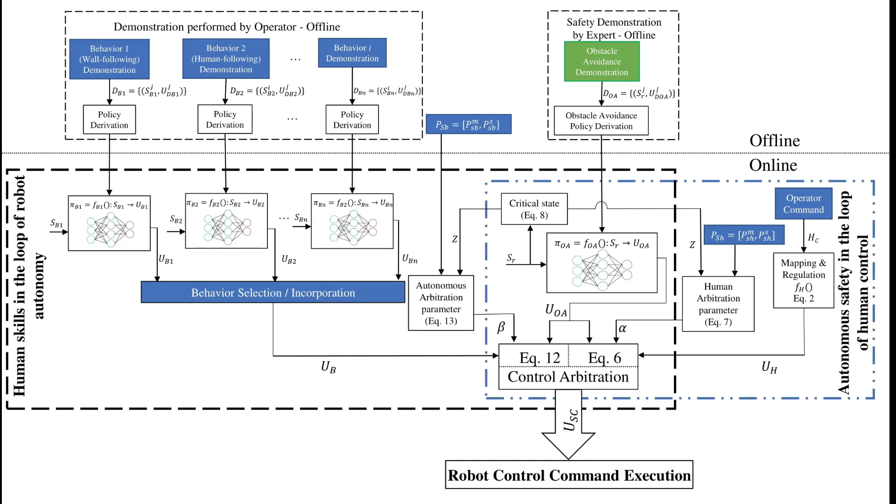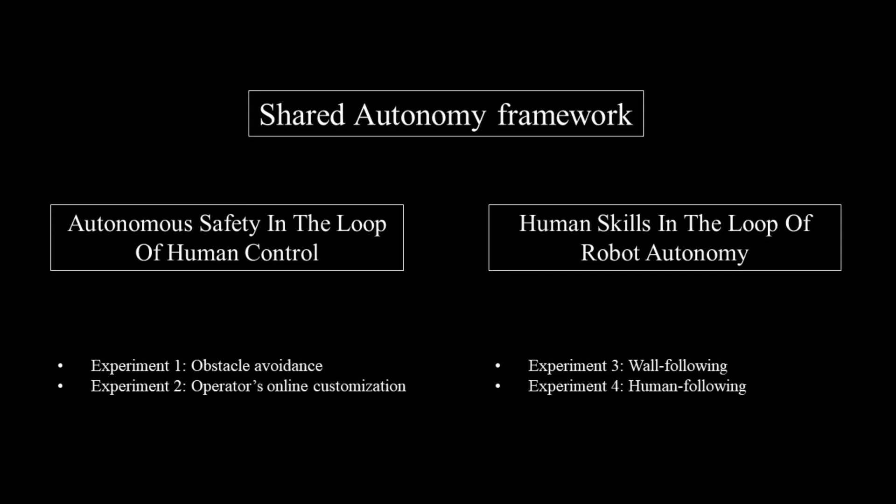In order to investigate various aspects of the framework, 4 experiments were conducted. The first 2 experiments would analyze obstacle avoidance capabilities of the first structural block in various conditions and the effect of online user customizable safety parameters. For investigation of human skills in the loop of robot autonomy, 2 behaviors of wall following and human following are taught to the robot, and the performance of this structural block is presented in each case.

The first experiment is implemented to test the autonomous obstacle avoidance capabilities in the loop of human control for 3 scenarios and 2 different sized obstacles. The obstacle avoidance commands are generated by a trained shallow neural network based on the pre-processed ranging information from robot's laser rangefinder. As safety is a vital feature, it is learned from an expert's demonstrations.

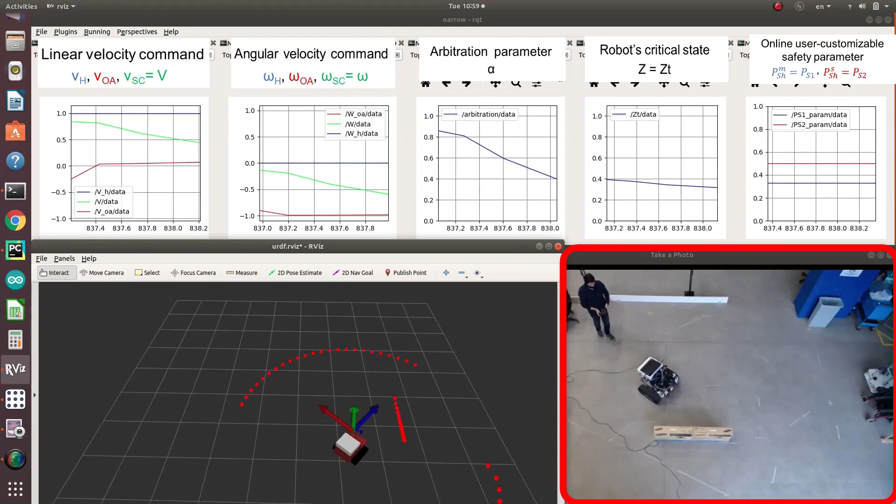Here is one frame of an experiment you are about to see. The bottom right window is a video clip of the experiment recorded by the top view camera. In the first experiment, the operator navigates the robot toward colliding with the obstacle. The arbitration function should gradually take control from the user and allocate it to the safety block. The bottom left window shows the robot's URDF and its pre-processed ranging information.

The operator's command is shown by a blue arrow, obstacle avoidance is shown in red, and the final shared control command is depicted by a green arrow. Similarly, the 2 boxes on the top left represent the linear and angular velocity commands of human, safety, and the shared autonomy in blue, red, and green.

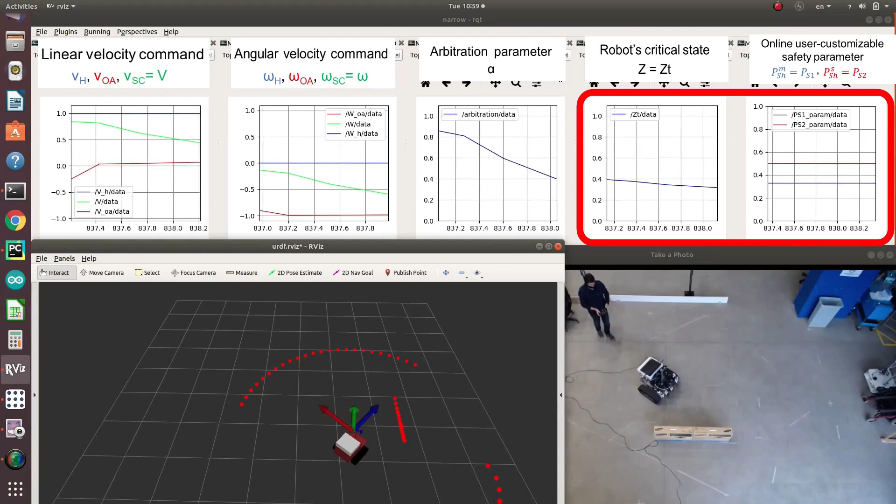The control sharing between the human and autonomy is based on the arbitration parameter, and that also depends on robot's critical state Z and user customizable safety parameters PSH. Z is defined based on the robot's pre-processed ranging information, and PSH defines the level and smoothness of the transition. As you can see, by decreasing the robot's critical state and based on safety parameters, the arbitration parameter smoothly decreases, allocating control from user to autonomous safety.

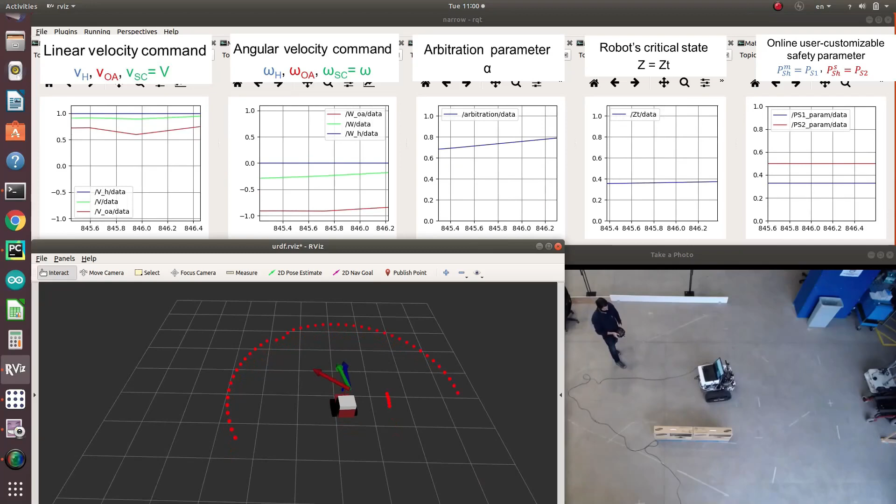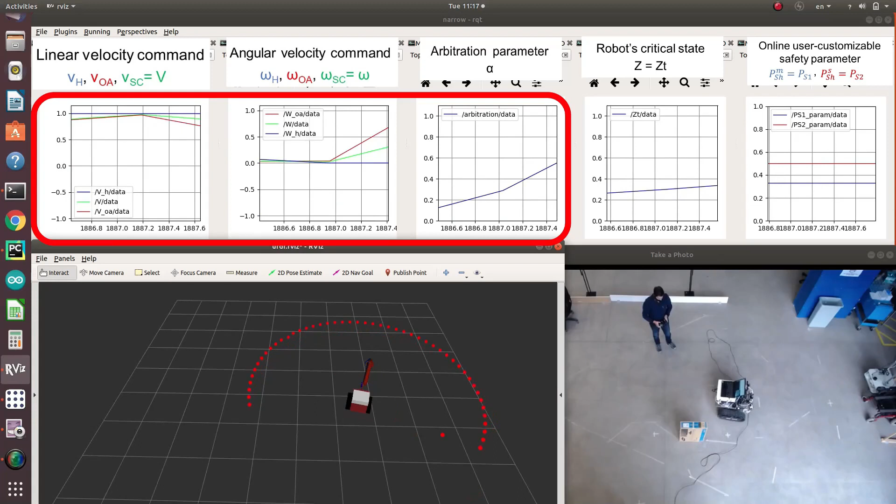Another item worth mentioning is that as soon as the obstacle is not in the danger zone defined by safety parameters, the arbitration parameter increases, restoring the operator's control over the robot.

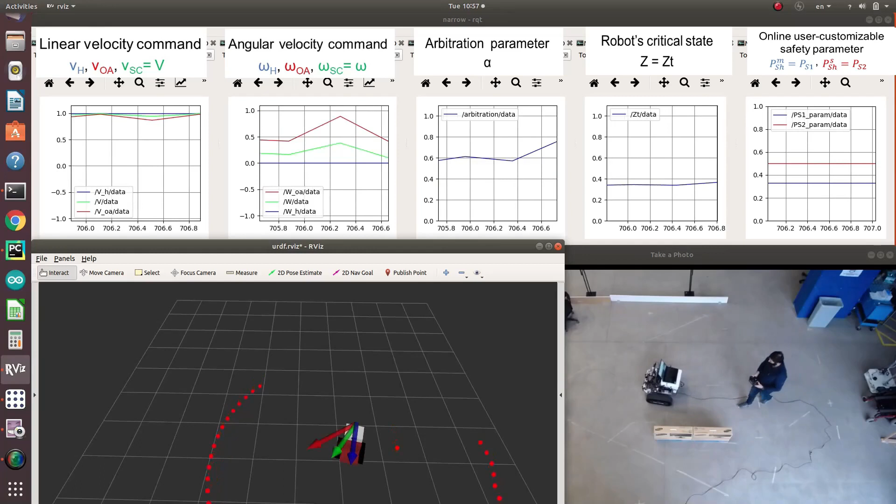In this experiment, we would test the online user customizable transition parameters. In real-life applications, an operator may face different scenarios and environments that a predefined level of safety would not be suitable for, and as a result, limiting his or her ability to finish a task. Online user customizable parameters allow the user to cautiously alter the danger zone to suit the specific scenario.

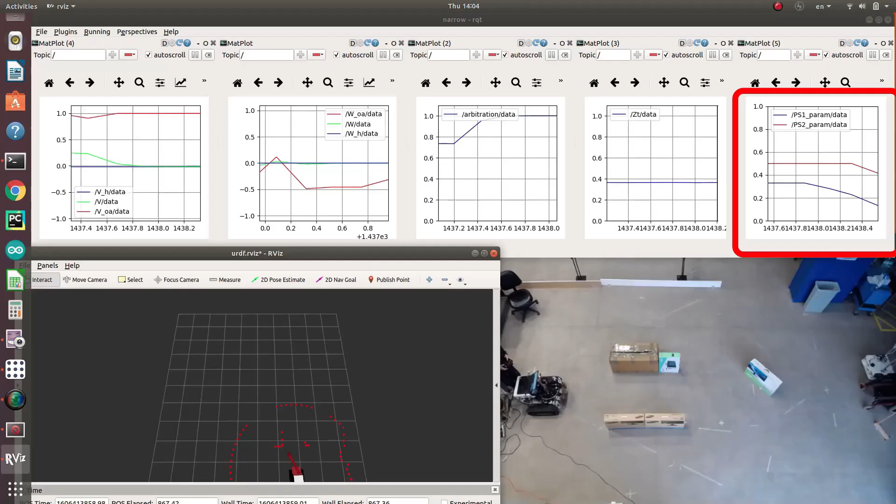Here, the operator should decrease the danger zone to pass through a narrow passage. After the pass, he restores the transition parameters and navigates toward the remaining obstacle, but autonomy steers away from the collision.

Now, we want to test the capabilities of human skills in the loop of autonomous control. This mode allows the operator to teach structured behaviors to a robot through learning from demonstration. The output of the trained model is then fused with aforementioned obstacle avoidance command based on the arbitration parameter, ensuring the safety of the behavior. The arbitration parameter itself depends on robot's critical state Z and offline user-defined safety parameters for the behavior.

In this work, wall following and human following were selected as examples of required structured behaviors and learned from the operator. Wall following is learned from operator's demonstration in some simple short scenarios. A shallow neural network regressor is used for the training process. Now the trained autonomy is faced with two complex wall following scenarios. Here is the first scenario.

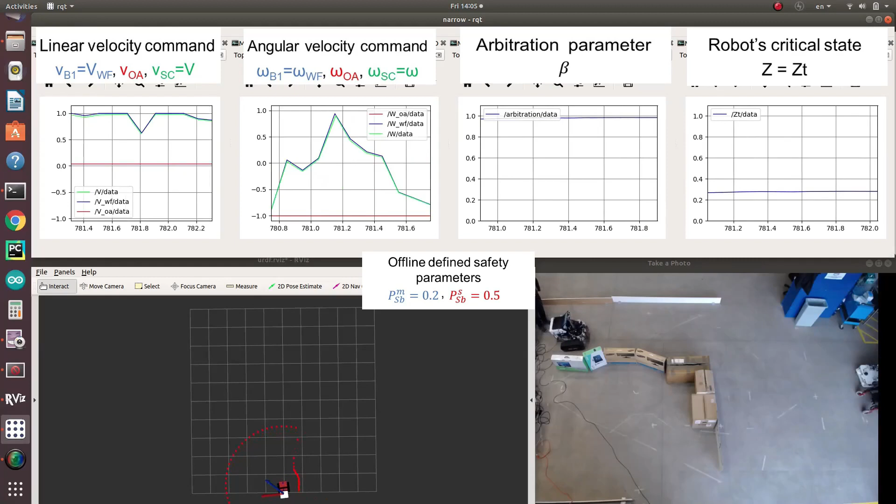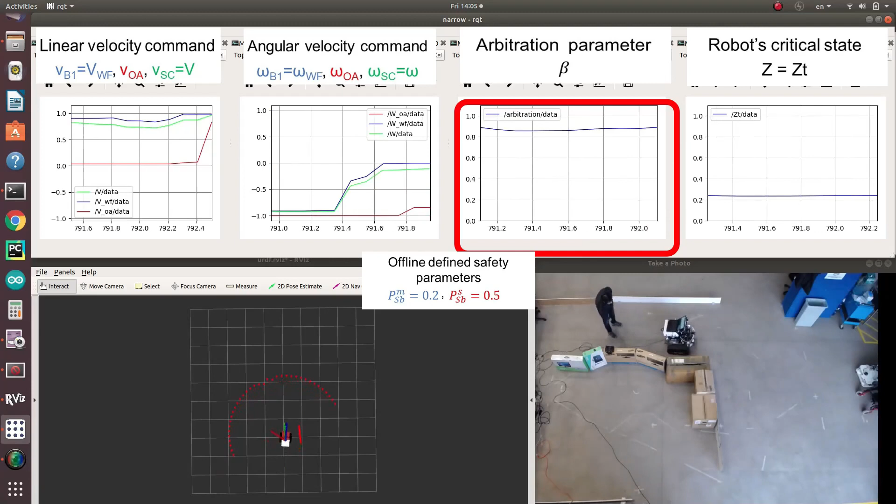As you can see, the fusion between wall following and obstacle avoidance is governed by the arbitration parameter. Offline safety parameters are set by the operator based on his experience of the task and environment, ensuring the safety and smoothness of the operation.

As you saw, a model trained from a simple structured neural network was able to mimic operators' behavior and complete two complex wall-following scenarios with human-like performance.

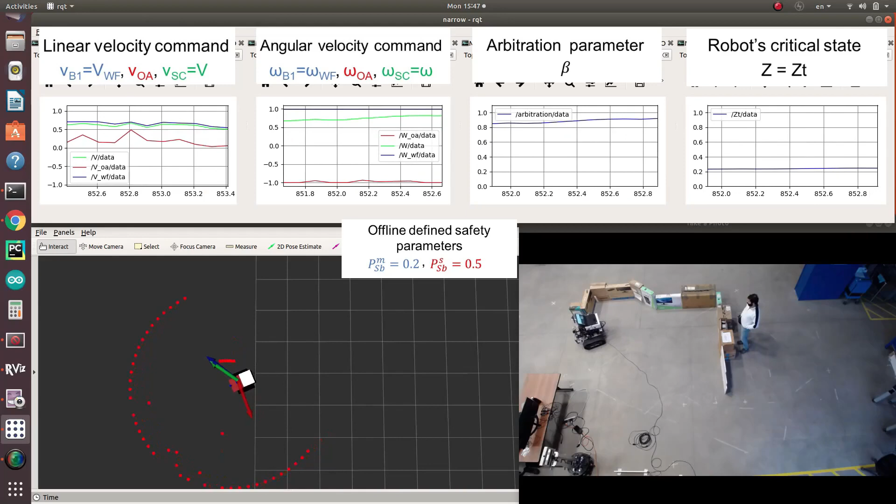As a second example of autonomous behaviors learned from demonstration, the operator trained the mobile robot for human following. Human detection and tracking are done using an RGBD camera. Target's relative position and distance to robot were chosen as inputs of a 4-layered, simple structured neural network regressor.

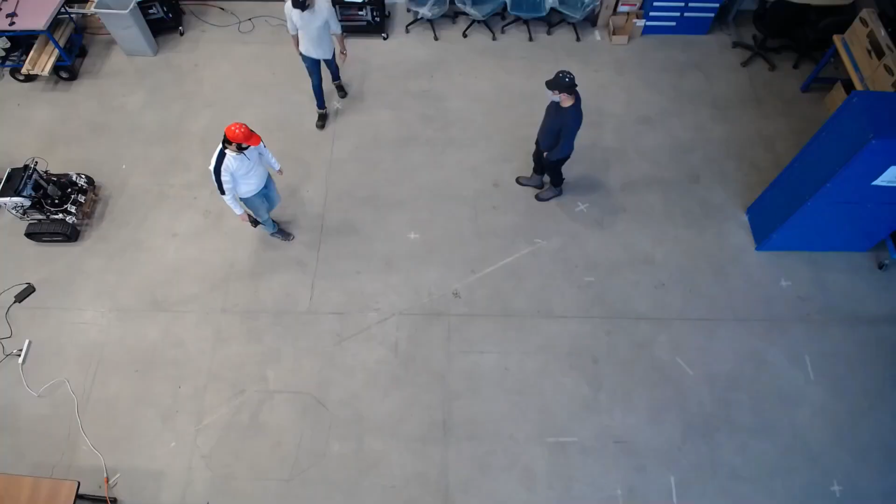Output commands of the trained behavior are then fused with obstacle avoidance commands based on arbitration parameter to ensure safety in human-populated environment. For demonstration, a scenario was designed where the robot has to follow the person in the red hat. The second person passes the robot in the front to add distortion and increase the complexity.

Third person in blue shirt walks toward the robot to test the obstacle avoidance in a dynamic scenario. We have recorded this experiment from multiple sources, including a top view camera, motion tracking system, robot's camera, and RViz.

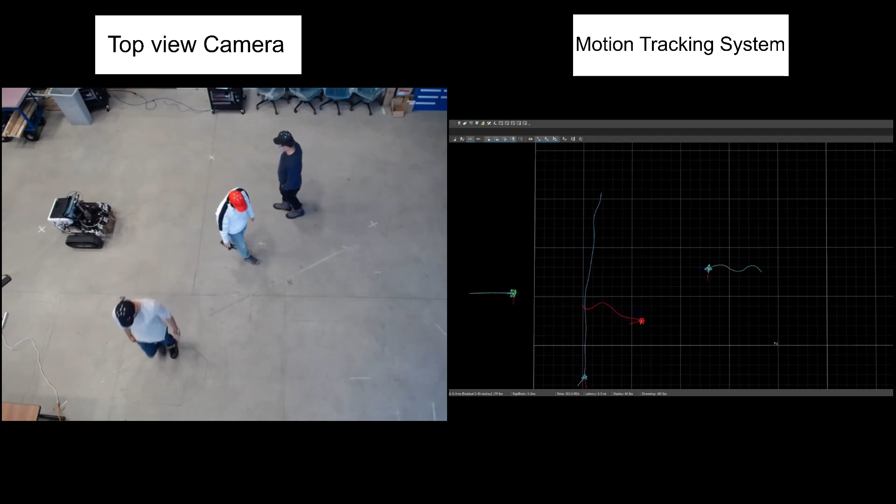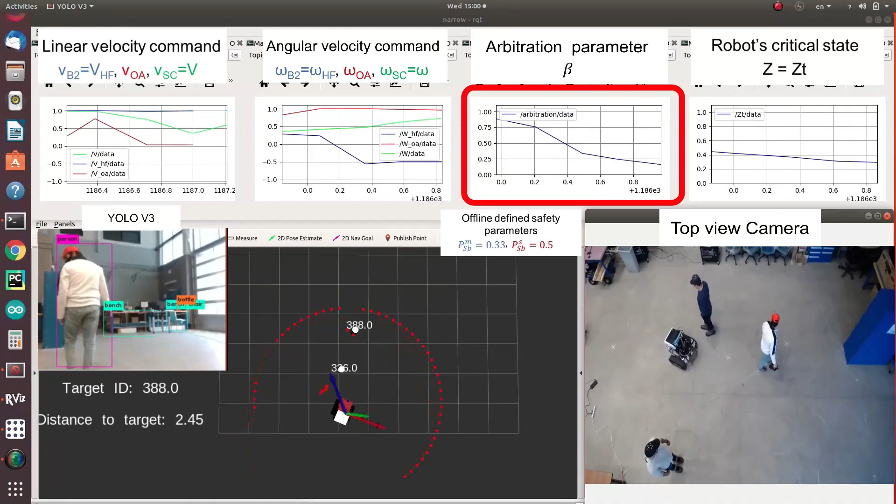As you can see, when the person in blue approaches the robot, the arbitration parameter drops, giving more weight to obstacle avoidance command. When the situation clears, the robot continues to follow the target. Furthermore, this experiment showed the capabilities of obstacle avoidance in facing dynamic obstacles. Thank you so much for your time and attention.